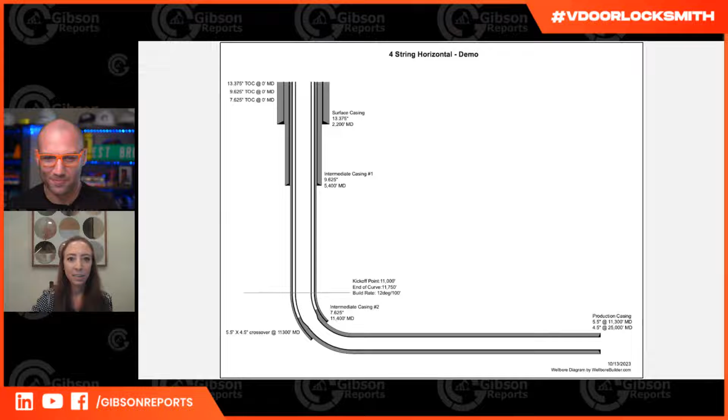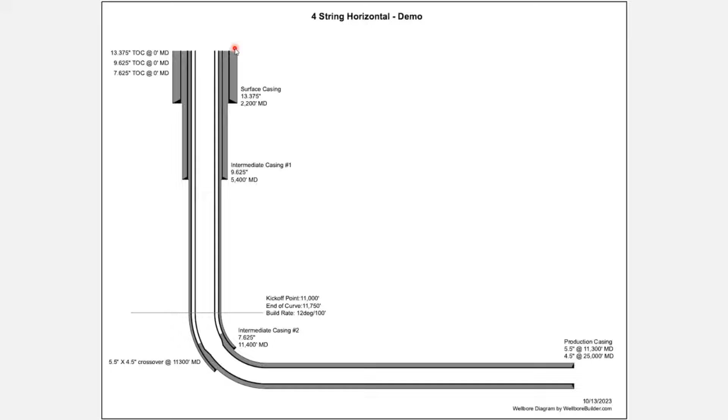All right. So the title says 4-string horizontal demo. Okay, so 4 strings means we got 4 strings of casing. So we'll start up here at the top. This is surface up here. We have labels that tell us TOC, top of cement, is at 0 MD. So up here, we could draw a little rig. So we have the rig up top. We have all those tops of cement at surface.

So starting on the outside, we have our surface casing. And this is going to be a structural casing, but it's also going to protect our freshwater aquifers. So this is pretty much going to be required on any well you see, surface casing there. And it's usually pretty big. Pretty big hole, pretty big casing.

Next up, we have our intermediate casing. This is at 5,400. This is just a made up well. But your intermediate casing is going to cover any hazards between your surface shoe and where you're trying to go to your target interval.

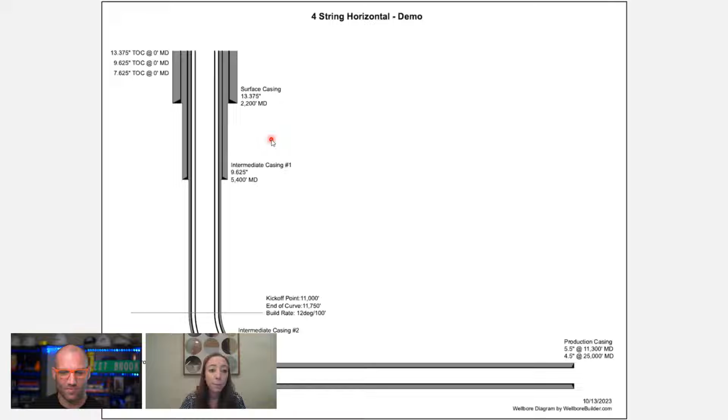So this could be, if you're in an older oil field, maybe a shallower formation here was a big producer back in the day. And now you have a lot of depletion there. Maybe that depleted interval has been converted to an injection interval, and you're going to see a lot of flow through there from offset injection.

Or maybe like in West Texas, there's a big chunk of salt there that you need to cover up. So various reasons for an intermediate casing. Some wells don't need it, and a lot of them do. Just depends on the hazards that you are encountering uphole.

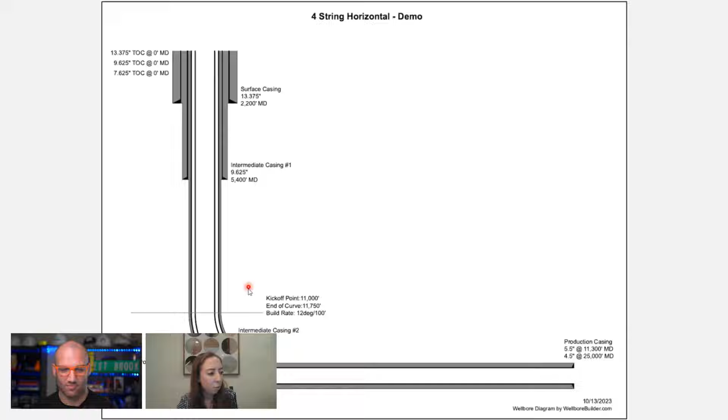So if we move on down the wellbore, we hit our kickoff point. We start to build our curve for that horizontal, and then we see another casing. So we have 2 intermediate casings on this well. So the costs are adding up in my head. You know, this is getting kind of pricey.

So we have this shoe set in the curve, and typically this is going to be because you're expecting higher pressure in your lateral than what these formations can handle. So you're going to protect against a potential underground blowout by covering up any weaker formations and getting ready for that high pressure interval, which we love. We love to drill a high pressure interval because probably we're going to make a lot of oil. So we like it.

Then we follow this horizontal down. We get to our production shoe. This is actually a tapered string. So we have a bigger casing size in the vertical and into the curve. And then we go down to a smaller casing size in the lateral because we don't have much annular clearance, you can see, between the intermediate number 2 casing and that big production casing.

And in some fields, you have a really tight window on your mud weight. You don't want to exceed it and frack the formation, but you need to keep that hole open and keep your well under control. So if you have a tight mud weight window, you want a bigger annulus. So we've done a tapered string here.

And this is a big feature I like to showcase. Drawing that taper in the curve in Excel is just tough, and drawing this shoe in the curve. So this is becoming a very common feature in a lot of basins across the U.S., so it's important to showcase. You can see our top of cement too inside that curve. All of that's pretty important to show on the diagram.

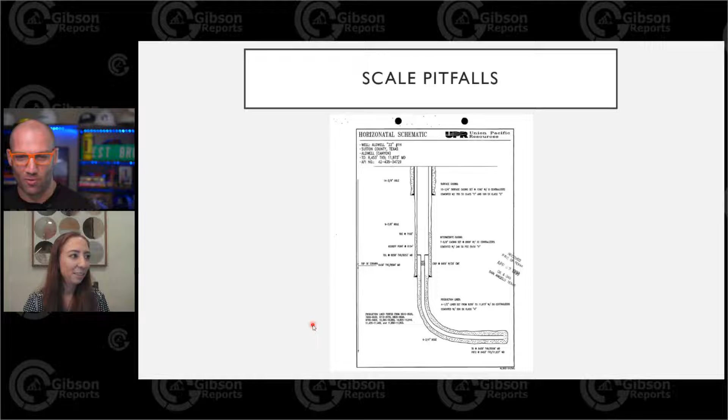Well, what are some common mistakes that might occur with the wellbore diagrams? Yeah, we'll skip forward a bit. Close your eyes, everyone. All right. Oh, wow, you got tons of awesome stuff in here. I'll make this a little bit bigger for us.

This is a beautiful wellbore diagram. I think it's hand drawn. You know, I love it. Has kind of a homey feel to it. Little dots showcasing the cement. It's nice.

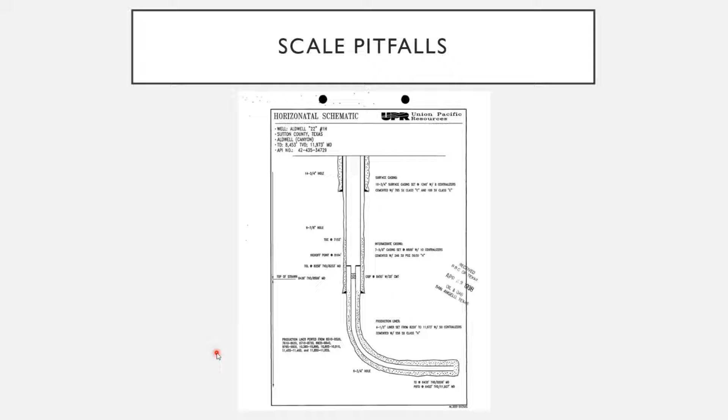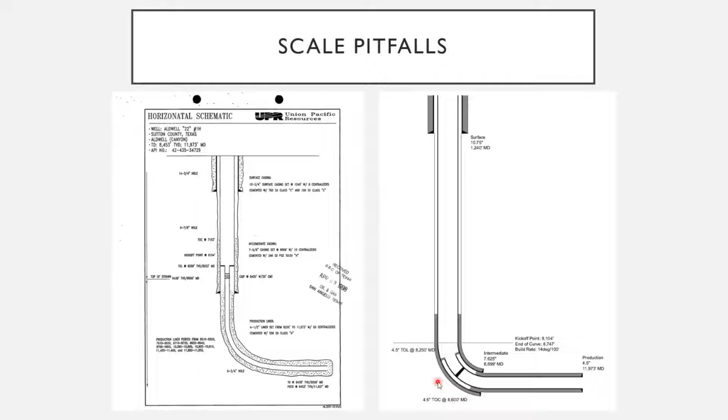However, when I look at the actual numbers on this well, this is how the wellbore diagram actually should have been drawn. So all of this that's happening up in the vertical on this diagram, it's in reality down here in the curve. So that's a pretty big difference. Like we just talked about, production could have a bigger pump deeper than how this diagram makes it look.

Our plug, we have a cast iron bridge plug right here for some reason. That's in the curve instead of in the vertical. If you needed to retrieve it or drill it out or something, that's a pretty big difference. So this would be a scale pitfall, I'm calling it, but a pretty common issue because it is so difficult to draw all this out. This is an easier way to draw it.

Wow. Yeah, I guess that visual representation could throw some people for a loop if they're just looking at it real quick and not taking in all of the context. Because if you're going to draw a picture, people are just going to look at the picture and take it as fact, as opposed to, if you're just going to have data information on there, then just have that, don't have the picture. But if you have both and they're not representative of each other, I could see where that would cause a lot of issues.

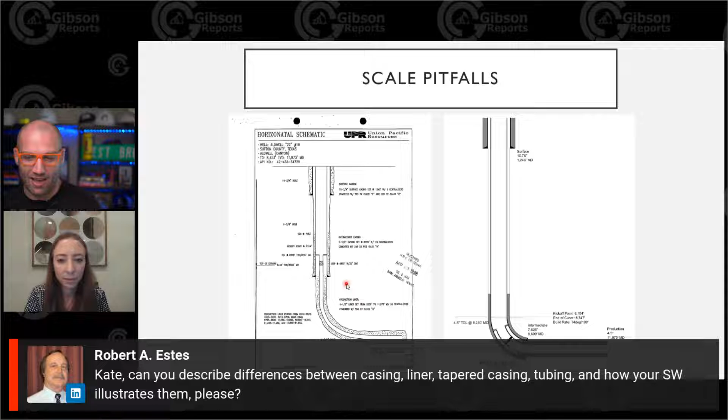All right. I do want to throw this out there. We've got a question that's already come in. Kate, could you describe the differences between casing, liner, tapered casing, tubing, and how your SW illustrates them, please?

Yes, great question. So casing, I would define as anything that's going from surface to a casing set point, to the shoe. We call it the triangle is representative of the shoe. So I would call a long string casing that goes back to surface, that would be a casing. And then down here where this casing does not go back to surface, I would say this is a liner, and we have this liner hanger right here. So the casing isn't connected up to the wellhead at surface. It is hung off a shallower casing.

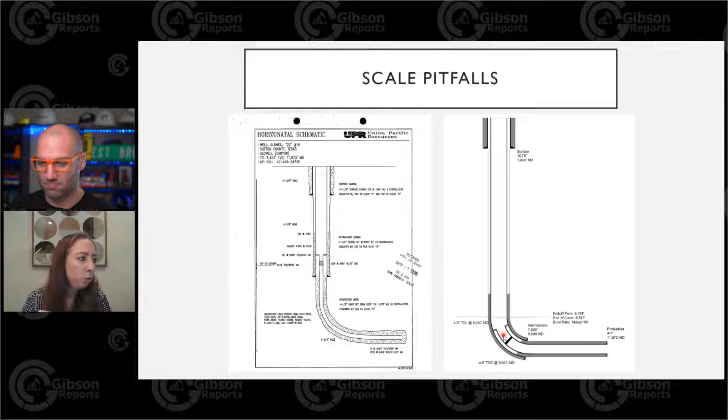And then tubing, let's see. All right, tubing would be something drilling probably doesn't deal with, and that would be on the production side that they'd run tubing within the casing. Here we show it with a packer right at the bottom of that production liner. And this is actually showing that this is an injection interval. So this is open hole, and we're going to pump down the tubing and inject into that injection interval.

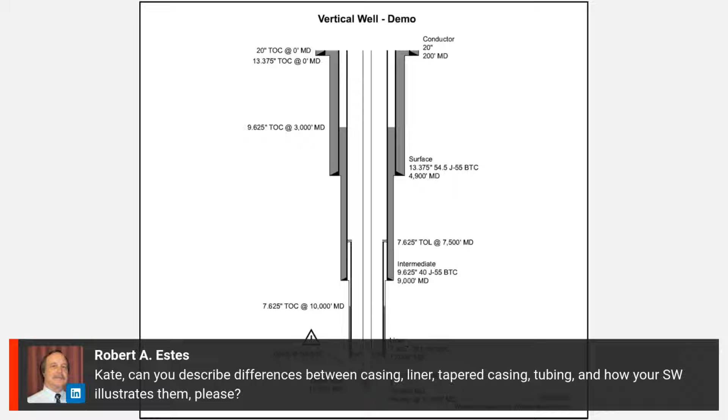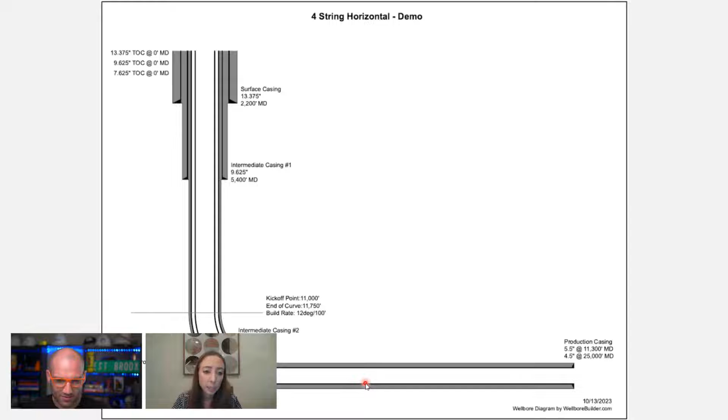Was there one more item on that list? Casing, liner. So here it was. Difference between casing, liner, tapered casing. Yep. So a tapered casing, like I showed here, is just very beginning, where we're going to change sizes, but the pieces of pipe that are different sizes are screwed together, and so that's shown in the illustration by these lines that slightly taper in to the smaller casing.

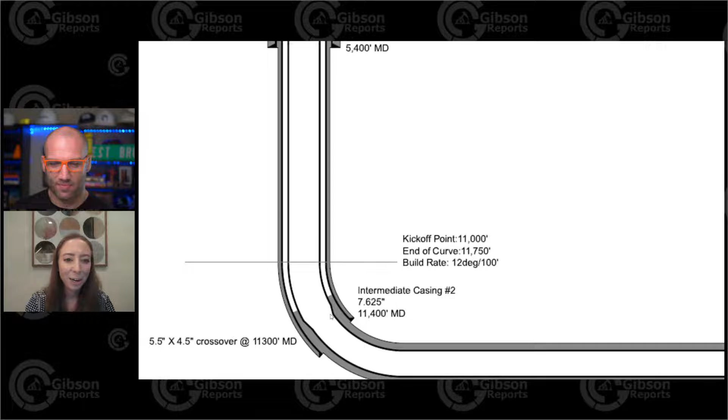So typically we're not going bigger. We're down below. We're typically going from big to small. And it could be multiple tapers. You might go 5.5 to 5 to 4.5. Just depends. You could have 10 different sizes of casing all screwed together. And that also occurs with different grades of casing. You might have a split string with 2 different grades for different reasons going on behind pipe.

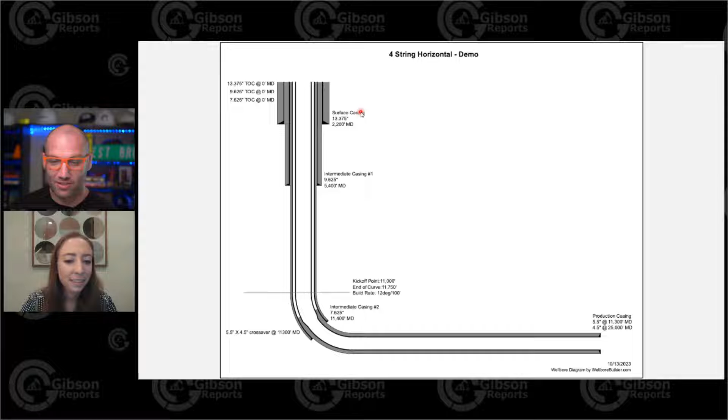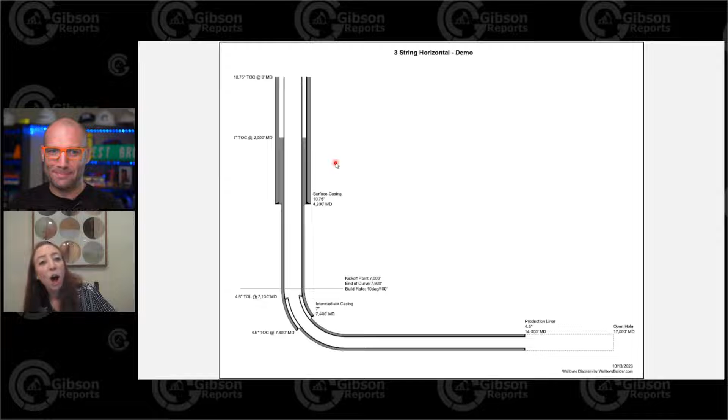So that's probably great. There are some rules about top of cement depending on state guidelines. And that's an important detail to share, whether you broke the rule or it's all good. Even if you don't get top of cement where you need it to be, it needs to be shown properly. Nobody breaks any rules in this industry. Oh no, well, to go in and remediate it after, of course, but you want to show the detail correct so everyone knows we probably need to go fix that later on.

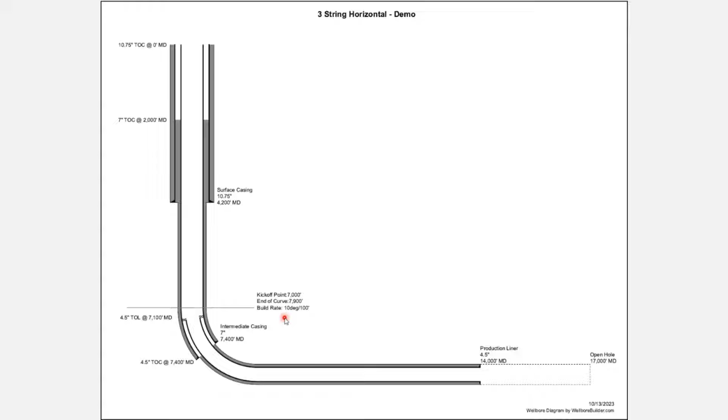And then here we see another little gap of no cement. The liner cement goes all the way up to the intermediate shoe, but didn't quite make it up to the liner top. It looks like we set this liner a little bit short, didn't make it to TD. We have this whole open hole section. So you can see this section is the same diameter as your production hole. So we can understand from that we actually drilled with that same size bit all the way to 17,000, but then for some reason couldn't get the casing all the way down there.

Oh, that's because our famous Aaron Baxter was probably the directional driller on that one. And probably messed the hole up.

But he says in here, critical for checking hole depth, knowing when you will tag up on a shoe, an extremely important tool for directional team, including MWD, David.

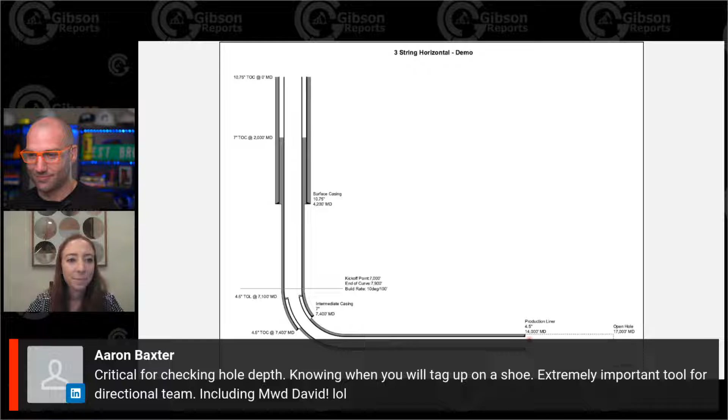So, goes to show how good of an MWD hand I was. I'm sure you were great.

But yeah, if you have this shoe in the curve, directional is probably not happy. You're not getting a survey for quite a bit, drilling blind for I don't even know how far out of that shoe trying to build the curve out. It's not the easiest setup, but yeah, important to know. And I think the diagram is a good tool to easily show it.

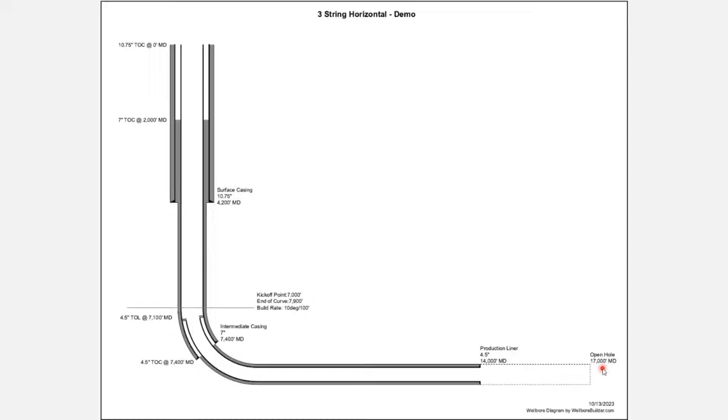And so does that show at what angle? Can it show what angle the casing was set at? Yeah, so this diagram specifically, it's not built to scale, obviously, because this is 17,000 and this is 4.5 inches. So it's not to real scale, but it is to a scale. And so whatever degree of the curve that is, it is to scale. So yeah, we should do that. We should pop an angle up there for sure.

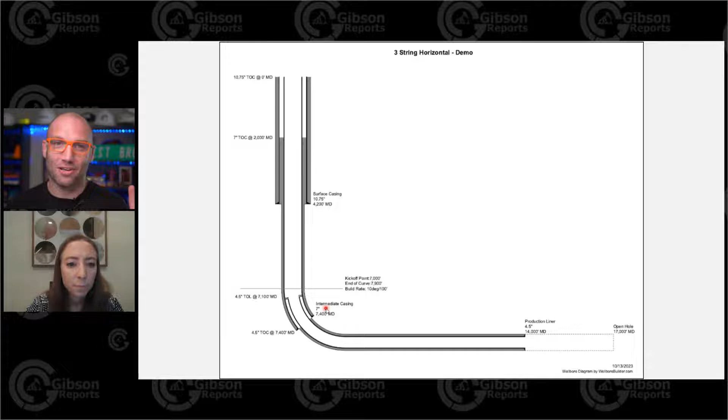I'm just asking questions, okay? So I like it. I mean, it's already calculated. And that's the beautiful thing. I love math, and it's math, and it all makes sense. And see, even Aaron says, it was me. See, it was him that messed up and couldn't get us our casing to bottom.

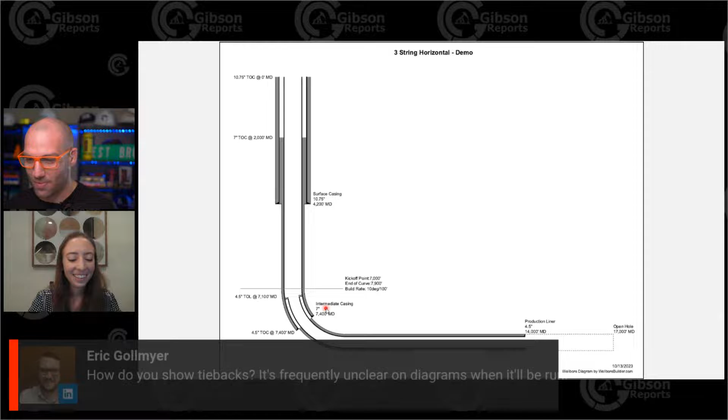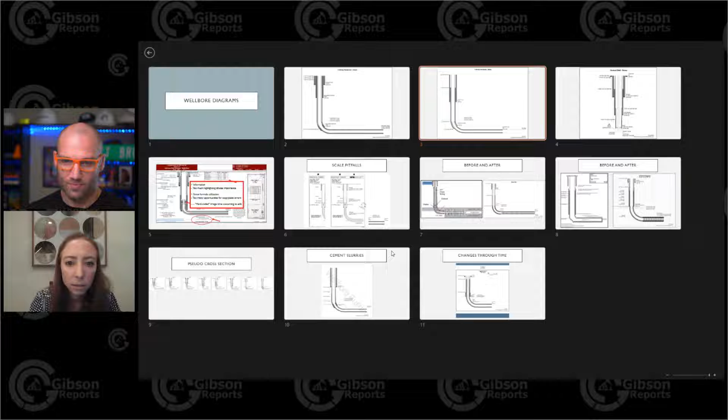As far as when it will be run, I think probably the best way to handle that is to have multiple diagrams for the life of the well. Don't try to put everything on one. Have a pre-drilling diagram. Have a, maybe even as you make changes to casing set points while you're drilling the well, have an as drilled at the end of that, that you're going to hand over to completions, and then have an as completed diagram.

And maybe you can show on that one tieback to be run. And then once it gets run, maybe publish a new one. Say, okay, the tieback was run. But I think having multiple diagrams kind of tells the story of the well as it gets built. So I think that's a good way to handle the when part.

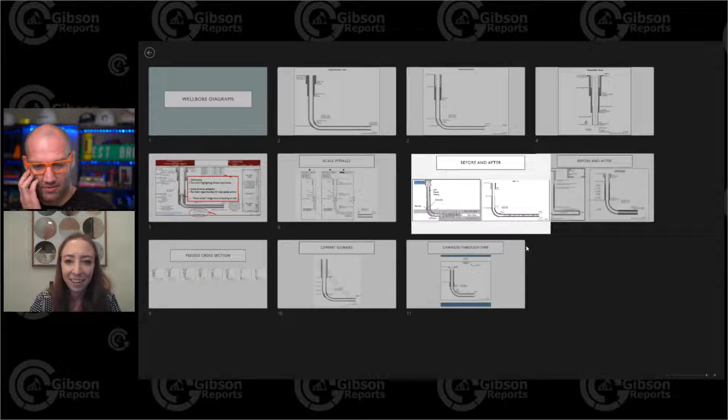Excellent. Okay, I know we're skipping around in here, and you had a couple of other examples. I think the next one was a vertical well potentially there, right? Yeah, let's check out the vertical. Okay, so obviously the verticals are a little bit easier to draw by hand or in PowerPoint, Visio, Excel, but they still look nice drawn in a web app too. So this one is here we've decided to show this conductor, which is not always shown on diagrams, because usually, as long as it's there, no one really cares about it.

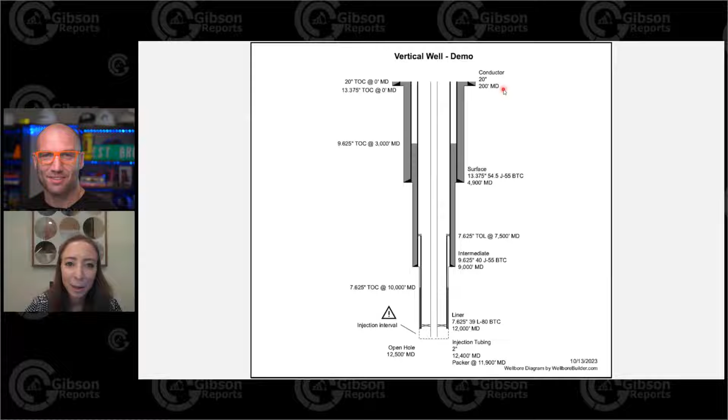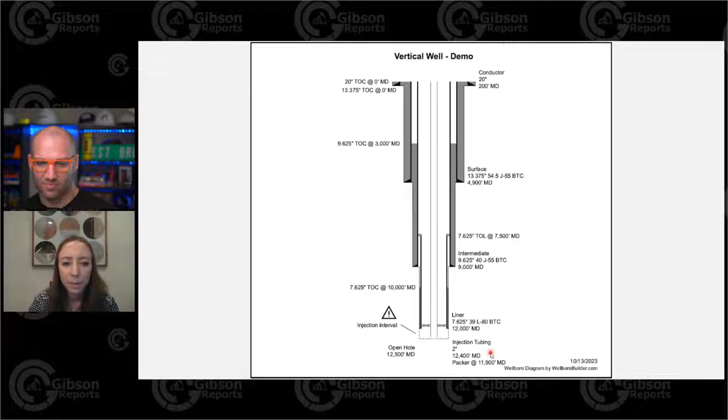So this is 200 feet of 20-inch up there looking really squished. And then we have this surface casing, intermediate. We did 7 5/8 liner, and then ran this 2-inch injection tubing, which honestly, I think we could go bigger than 2-inch in 7 5/8. We might consider upsizing that tubing there. Got a little icon here to show, whoa, look out, we're going to inject here. And showing that open hole with the little dash line.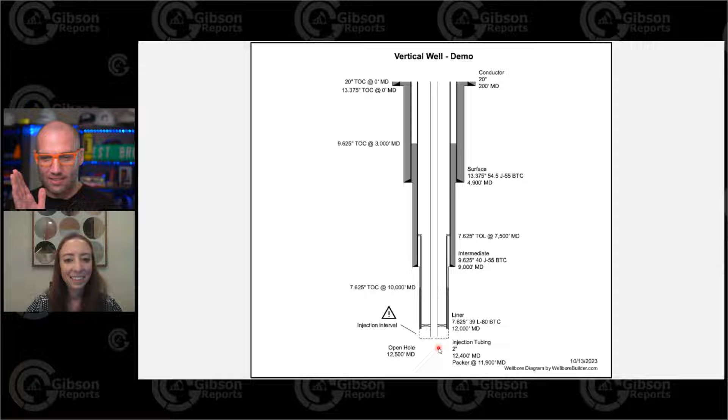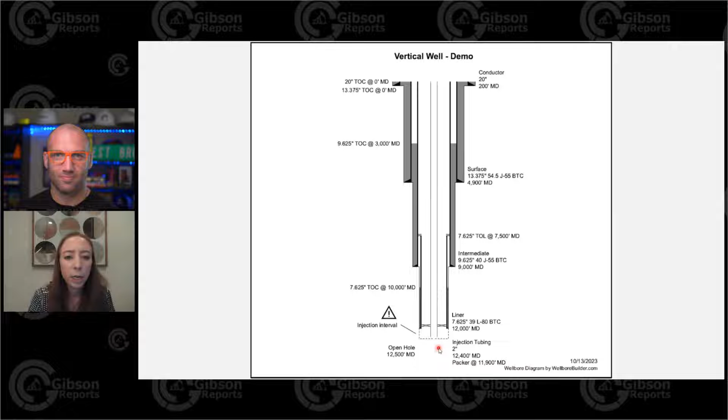Wow. Okay, we're starting to get some comments here, but I have a quick question. So is the sizing always on the right and then the top of cement comment always on the left? Is that standard? Personally, I don't think there's an industry standard, but personally, I like them to be separated out. In my software specifically, all the labels you see are draggable, so everyone can have it however they like. Sometimes it can get a bit crowded if you have a lot going on in the curve. Obviously the inside radius is smaller than the outside, so you can make it your own. I don't think there's a clear standard, but maybe we could all join hands and decide on one.

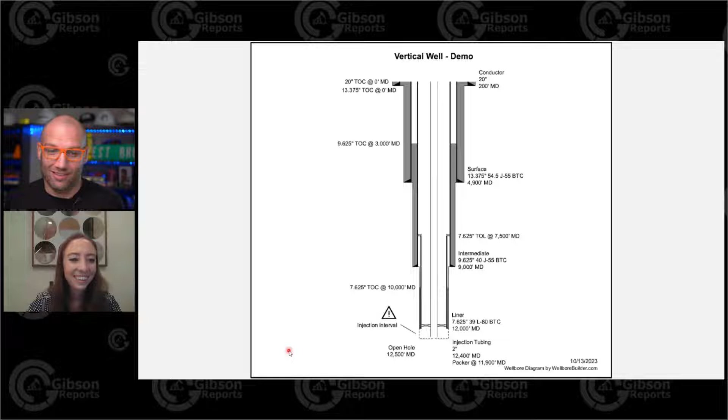Well, hey, you could be the one to set the standard, and everybody just follows it. Well, right now, I'll let everyone have creative license on that.

All right. So we're starting to get some more questions. This one's from Devi. Does it follow a data model? For instance, for casing, its weight, size, grade, connection, etc. This way, it's easy to import, export information, including correct location and information. Does it follow a data model?

Yeah. So I think you're talking about my software specifically. Sorry, David, I'm not trying to have a commercial. No, that's all right. I'm more than happy to have you come on the show and be able to educate us all, even if it's partially on what you do.

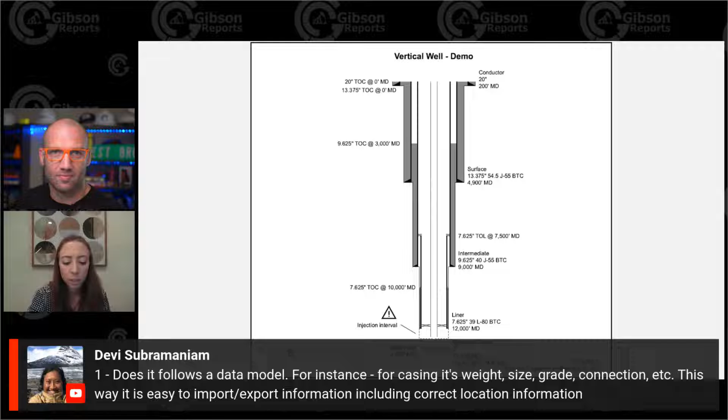But yes, this is actually one of the issues that happens with Excel, especially that location information. You know, there's so many decimal points in the lat long, and you've got to get it exactly right. And then there's a typo, and they end up in the wrong slot on a 10-well pad. So yes, all of that is very important. And in our software, everything is fielded out and we do have an API. So everything gets matched to its right field.

And I think that is my vision for the future, is that people aren't even typing into a web app. It's just all connected. And we have organized data from the start. And then there are no typos. Everything's connected. And no oopsies due to a fat finger. Preach. It'd be so nice. Nice, clean data sets.

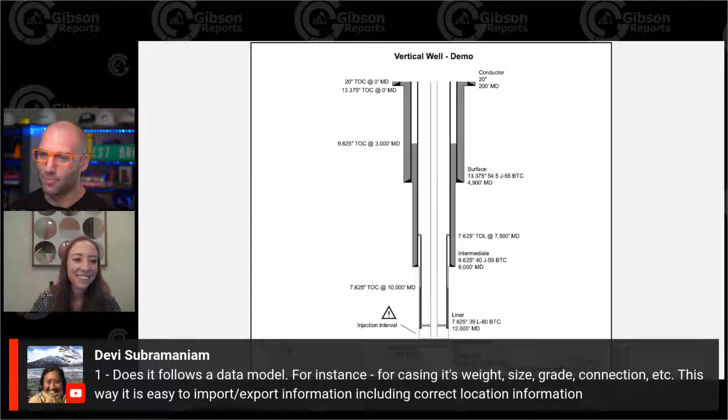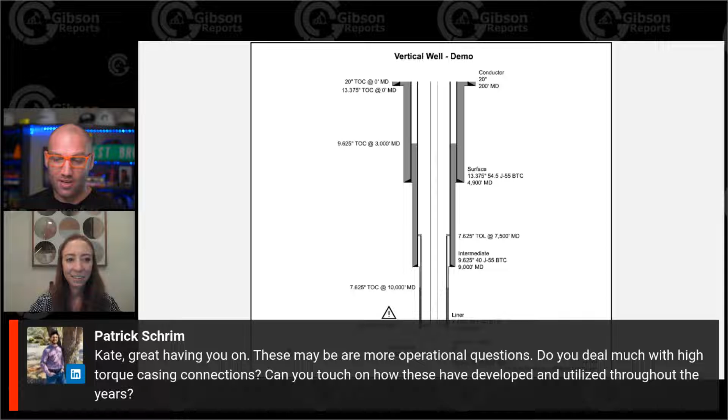Devi, thank you for your question. Do appreciate it. All right, Patrick asks, great having you on. These may be more operational questions. Do you deal much with high torque casing connections? Can you touch on how these have developed and been utilized throughout the years?

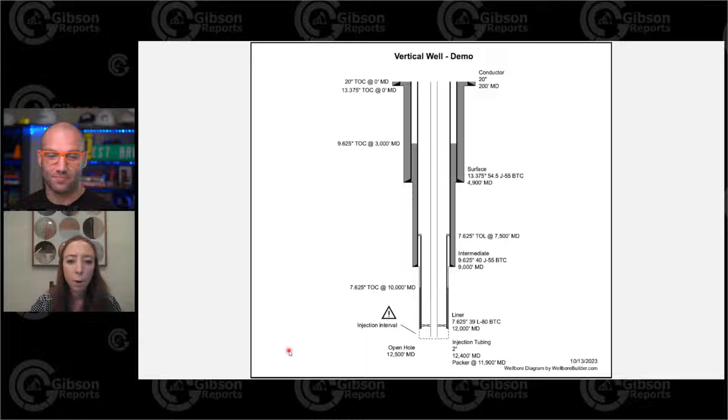I can try. I am not up to speed on the most cutting edge high torque casing connections. But I can give a bit of a history lesson, back starting out when I was on a rig years ago. We were running buttress casing, and there was this great invention called torque rings, a metal ring that you stuck in the slot there in the connection to butt up against to have higher torque. And I think there was a pink, a yellow, and a green size, and they would come out and measure your slots, your API casing, and then they have a pink ring for that one. And it gave us some extra torque.

And then the casing company started just building that in and cutting that into their connections, and then you didn't need the torque rings anymore. And then we started really getting into these different hole sizes and needing more semi-flush connections still with that high torque rating. So that's just from the U.S. onshore land perspective history lesson of the high torque connections. I'm sure there's a lot more going on now. Yeah, anybody that's watching, feel free to add your comments into the comment section about any of the other ones.

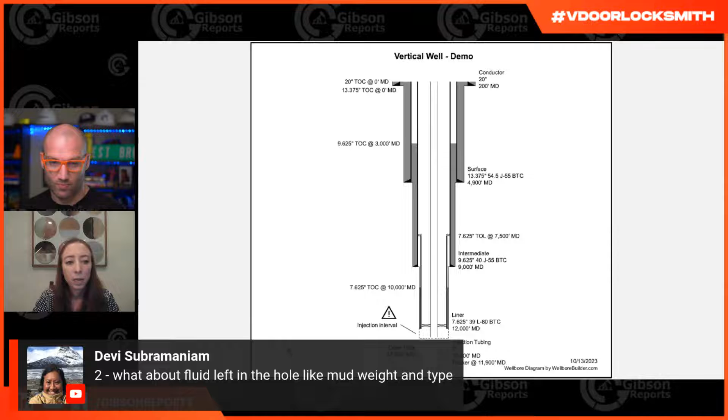Another question from Debbie: what about fluid left in the hole, like mud weight and type? Excellent question. That's usually very important to know, especially on the completion side when you're handing over. They need to know what fluid is left behind. Maybe to open a toe sleeve, they need to know what pressure to apply, and got to calculate that hydrostatic. And so, yes, I would definitely put that as a comment on a diagram as part of your handover. Definitely would call that out to the attention of the next guy touching the well. All right.

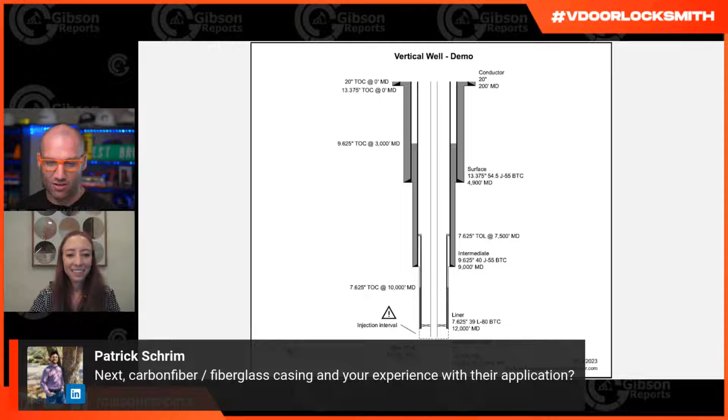Another question back from Patrick: carbon fiber / fiberglass casing and your experience with their application. I do not have experience. I would love to hear if someone else does. That's the first I've ever heard of carbon fiber being used. I've heard of some fiberglass applications, but never carbon fiber. So hopefully somebody that's watching can add their thoughts in there.

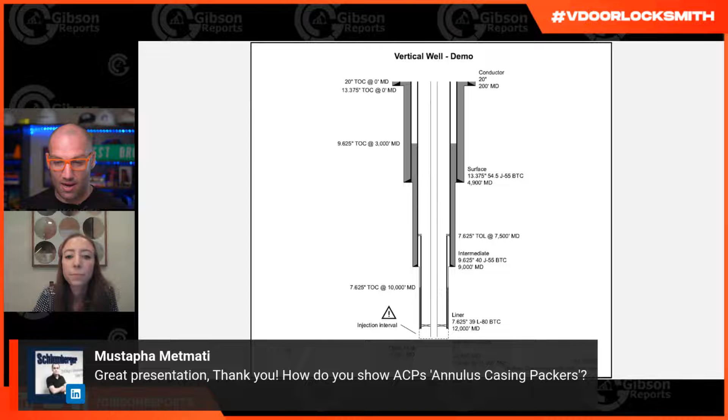Mustafa says, great presentation. Thank you. How do you show ACPs, Annulus Casing Packers? I have no idea what that even is. I bet you do, David. I bet you just haven't heard it be called that. Because a lot of times we have a DV tool, which would be a sleeve that opens on the casing midway somewhere in the string.

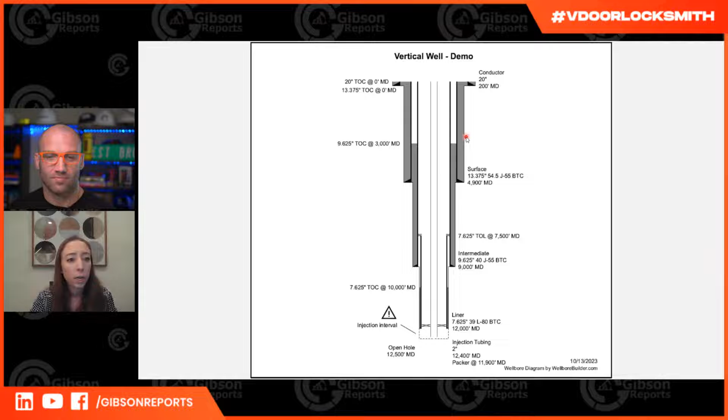So say right here, or let's come out one. Say we had a loss zone here and we weren't going to be able to get our cement up above it. We could have a DV tool that opens, and then we're going to pump through that DV tool to have a lighter fluid column and hopefully get that top of cement where we want it.

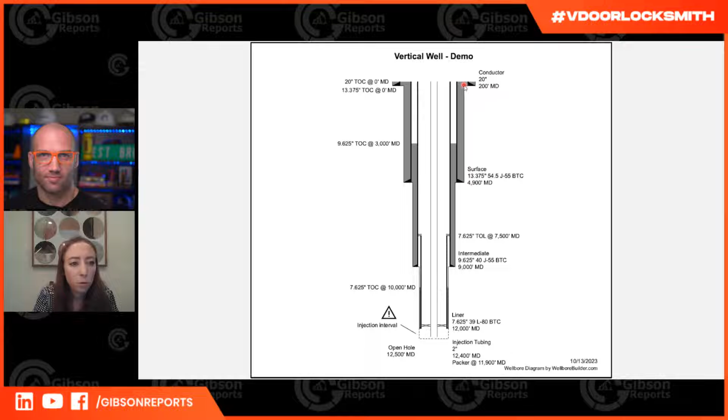And a lot of times that will also have that packer underneath to help stabilize that fluid column. There are other uses as well, but that's one of the more common ones we see. I do not have an example of it, but we draw it similar to these hanger packers there, a box with an X. Box with an X.

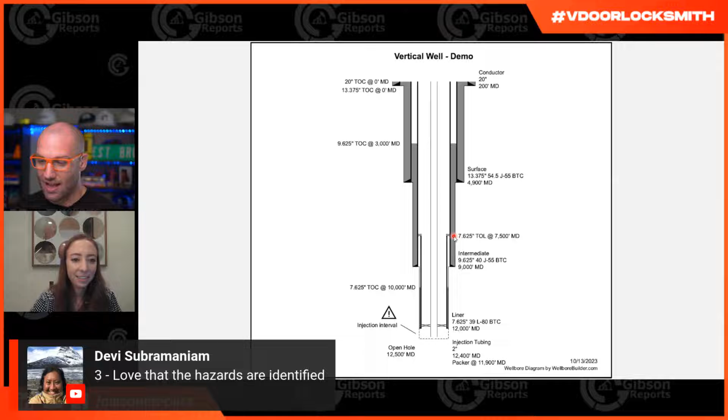Okay. All right. Debbie says, love that the hazards are identified. Thanks, Debbie.

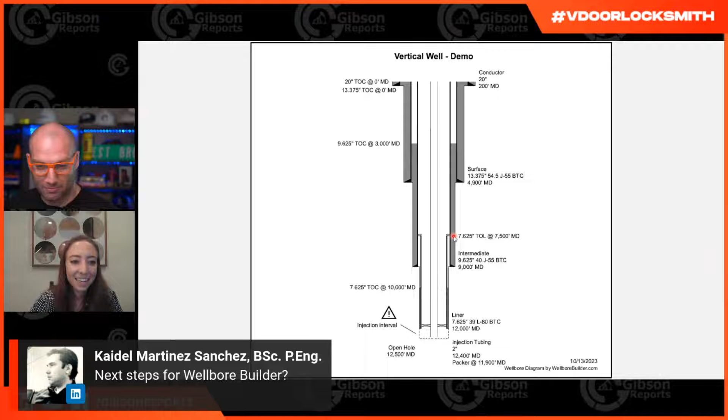Here's a great question. Next steps for Wellbore Builder. Next steps, like I said, would love to have a broader digitalization effort. Would love to integrate this visual with existing data frameworks to get rid of that user input part where you're introducing errors and wasting people's time sometimes. Not always, but sometimes, you already have the data set up in a nice format in a database somewhere. Why not just push it on over to us and have the image show up for you?

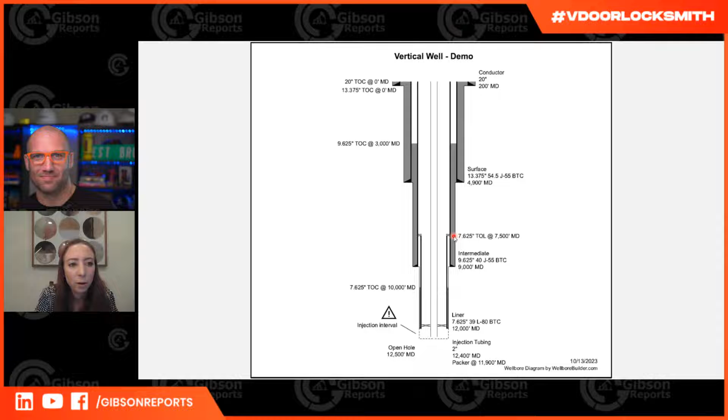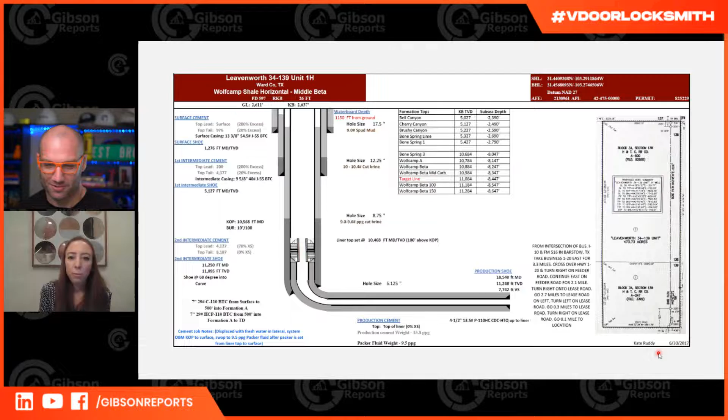Makes sense. All right. So what are some of the other examples I know that you've got in there for us? Okay. So my name is down here at the bottom. So I made this, so I'm not hating on anyone else, just myself. This looks like a pretty nice picture. I made it, so I don't think it's terrible, but a few things I did want to call out.

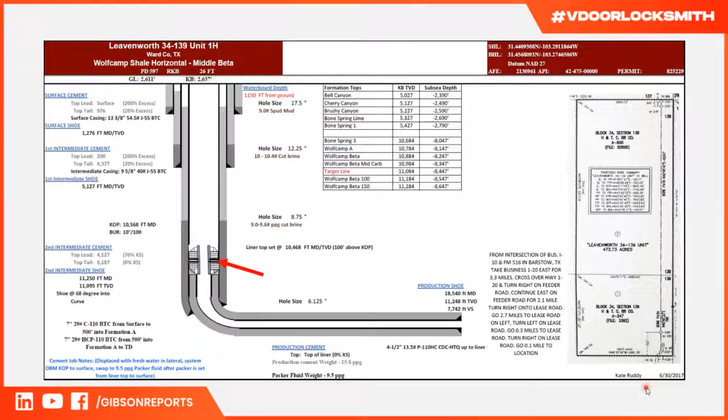First off, I don't know if your eye went straight to this weird cartoon of the liner hanger. It did. Seems a little out of place, but that was the template, so I kept using it. It looks a little crooked too, so that's not my favorite thing. Like I just mentioned, I like a clean diagram. Keep it simple. Don't have the cartoons in there. Just geometric shapes. Next, you see it all over the place, but here especially, we have multiple font types, multiple sizes, all caps, gray, black, Times New Roman. Just a lot going on.

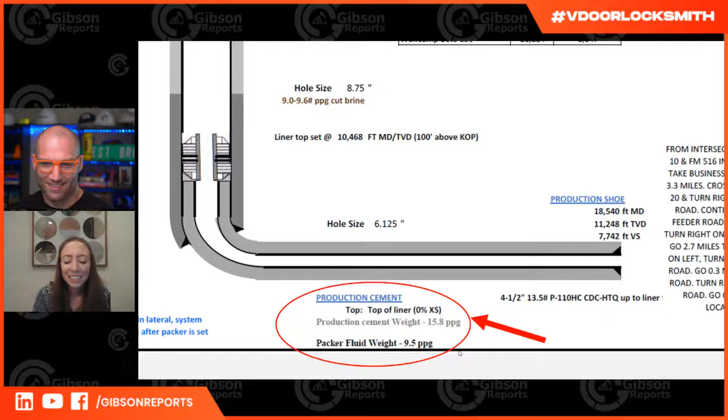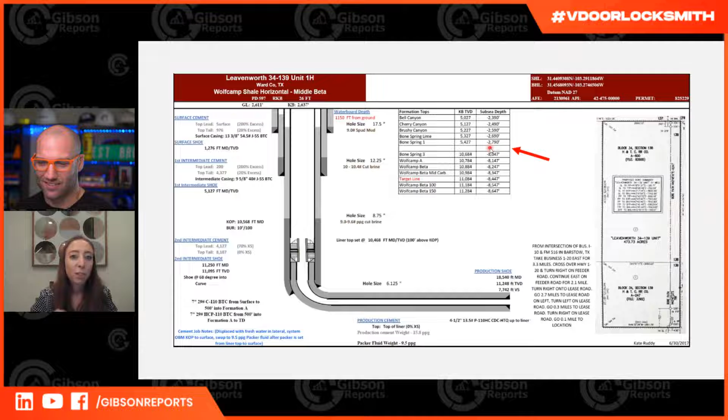And then up here, we have this blank here. For some reason, we didn't get a top for the Bone Spring 2. Seems important to know. It's not there, but that had to be left blank because there are formulas on the next tab of the spreadsheet that are pulling in from that table. And if you put the second Bone Spring depth there, the formula would have been wrong on the next page. So we had to leave it blank, and it just doesn't look great.

So in summary, this is super informative. We're getting a lot of information here, but all the different colors and highlighting every different thing really dilutes the importance of them. The formula utilization is great to simplify downstream tasks, but there are still a lot of opportunities for those copy paste errors. And then the hard coded image, it's time consuming to edit. Moving these little triangles further in the curve is not a big deal, but this curve cement, man, it is a pain to edit. So just another type of diagram, a colorful one, I guess. And then the cost of color printing, add that to the list.

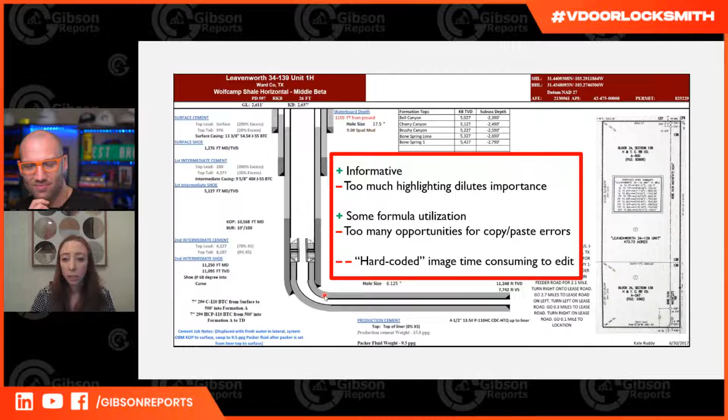So how often is it, because I noticed that the plat is there as well. How often is that in the Wellbore diagram, or is that included? Because I know there's more information on this one than what I've seen in some of the other examples. Yeah. This is really a roadmap for the well, including we even have driving directions to the well. So I think it's personal preference. I think it is helpful to have the plat, a little bird's eye view next to your cross-sectional view.

I love the imagery, especially if you have a multi-well pad with a lot of different slots. It's helpful to have that zoom in also over to the side. I think it's totally personal preference, and you might want to provide that to some people and not to everyone. It just depends on your specific operations, but I think it's sometimes useful to have the plat there.

What could potentially go wrong if the information on a Wellbore diagram is not displayed correctly? Like you showed us that example in the past where everything looked like it was taking place in the vertical, but it was actually taking place in the curve. Do you know of any stories or any instances where something like this was displayed in the Wellbore diagram and actually ended up causing problems down the road? Yes. This well we're looking at was drilled in the wrong slot.

And unfortunately, the other well isn't shown on this plat, but the other well was going the other way. So we swapped which well went which way. And so we ended up, it was a big, I think they were different lateral lengths too. This looks like maybe 2.5 miles or something.

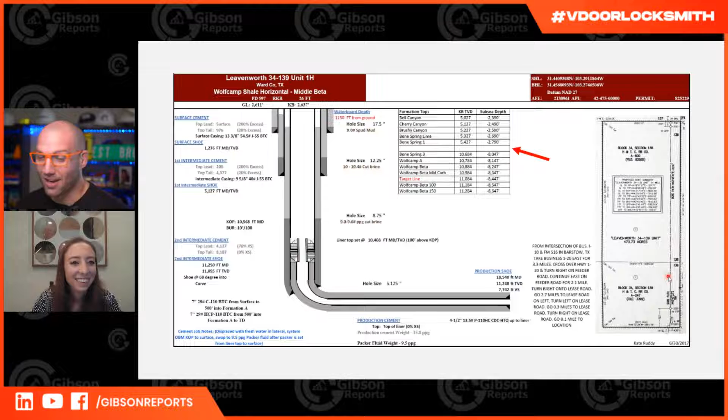Ooh. Wow. Okay. All right. So you've got some more examples there. That's a lot to take in. It's like how did we... Okay, we saw that one.

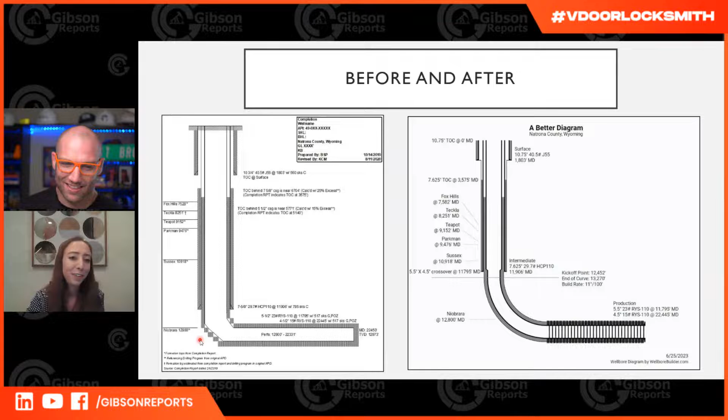Okay, here's another one. You can tell this was done in Excel. We got this blocky curve down here, which honestly is pretty smart. Just fill in a few cells. You get the idea. This has a very 8-bit look to it. Yeah, right. It's not putting your best foot forward when you submit this out to the world.

So this is my beautification. I think it is great to have these formation lines here. On this example, I've called them out using these leader lines. I do think the straight line is a great visual also. I might have an example of that later on too. You can see this straight line. You're encountering that Niobrara in the curve, which is good to know.

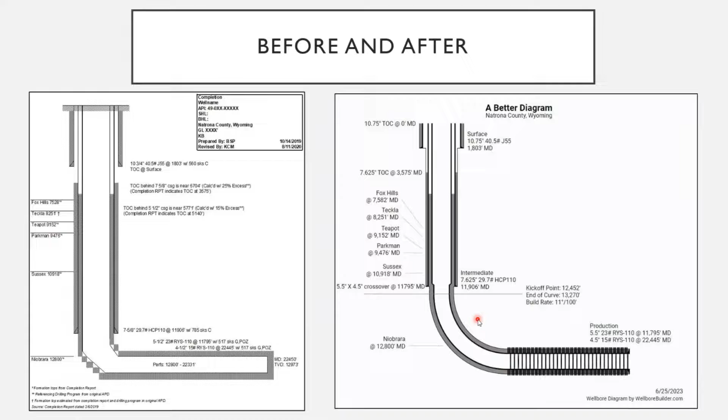We got the taper here too. I think they just left the taper off in that Excel example. So just a little bit more information and a lot nicer looking. Should definitely post some of these before and after pics on LinkedIn.

All right. I noticed in the horizontal there, you've got a lot of vertical lines on it. What are those representing again? Yeah, so we have a completion. This was obviously not in the before picture, but we did put a completion on it. So each of these inside the casing represents a plug, which would basically be one stage of the frac. And then we have one little line for each cluster.

And you can change the imagery to be however many lines you would like to see. Or you can have it scale with your cluster count. Wow. I've never seen one with this level of detail on it before. This is fascinating. I'm learning so much here.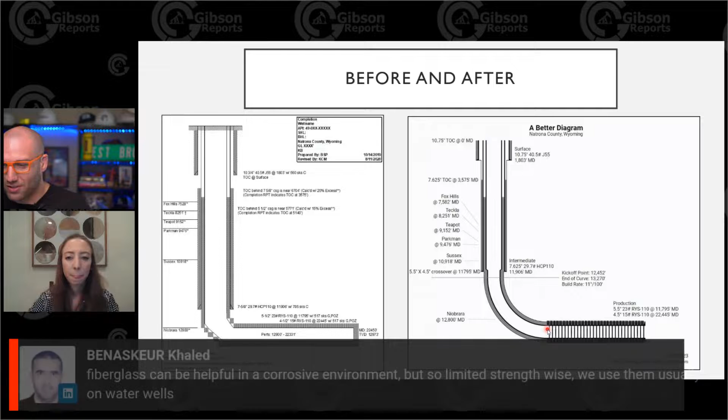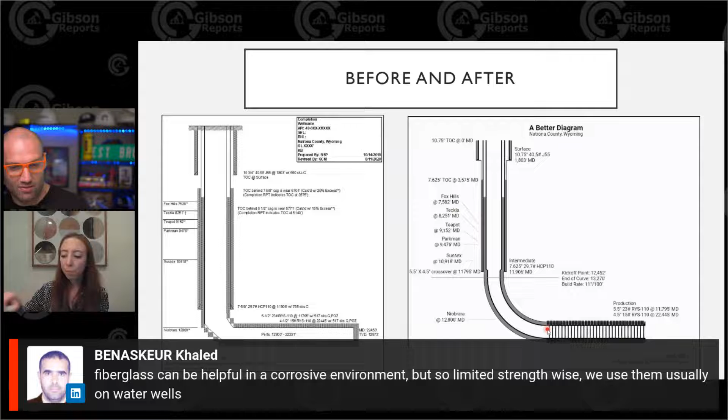So a couple of people have commented here. Fiberglass can be helpful in a corrosive environment, but so limited strength-wise, we use them usually on water wells. Well, thank you, Khaled. And then Eric said a digital pipe tally is much needed. I do believe there's some people out there doing that. I'm not 100% sure. Have you encountered that at all, Kate? I would love to hear some company names thrown out. Oh, okay. Anybody that's doing digital pipe tallies, let us know.

From my perspective, it would be a fairly easy thing. Lasers can measure distance, thing on either end. Boop, boop, boop. I don't know. Maybe it's one of those ideas where it's so simple, why didn't we do it, right?

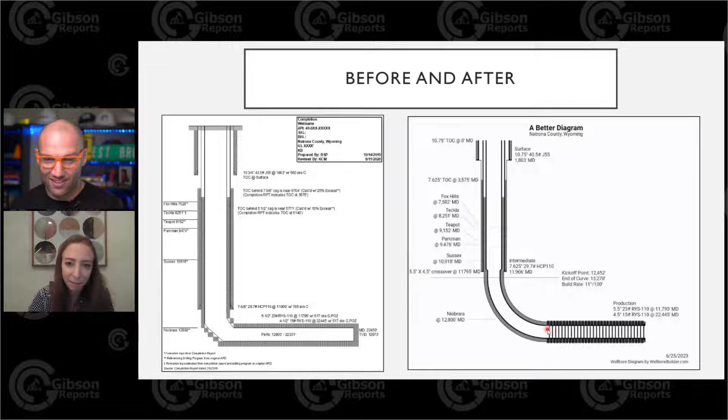All right, so do you have some more before and after pictures for us there, Kate? Oh my gosh, what was all those? I am out of before and afters. Okay, so a different use case for wellbore diagrams. I was playing geologist. Ooh.

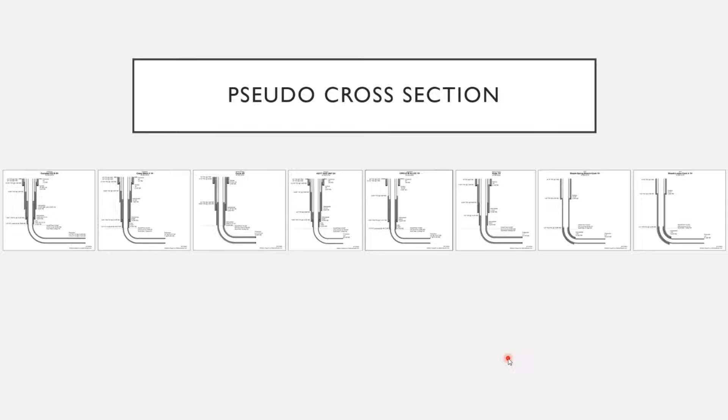Sometimes in drilling, we think of man-made features as important geologic elements. I remember a place where I first started drilling. North of the highway was okay. South of the highway, not okay. So for this look, I was just following a highway and building out diagrams as I went along that highway. And it's kind of interesting to see, they're small for a reason. We don't need to get bogged down in the details, but this is complicated.

And then I got over to the east side and oh my gosh, whoever this company is on the eastern edge of this route I'm taking, they have it figured out. This is way simpler than this. And then I dug into it. I like to do a big data sweep to find out where you need to dive in. So diving in, I was like, let's find out the secret over here, what they have figured out.

And turns out it's the same depth and the same field name, but it's actually a different target formation. So probably lower pressure. They don't need to have all the different casing strings. They can just get that one all the way down into the curve and then drill their lateral. So a quick learning, taking a drive down a highway, building diagrams along the way.

Wow. So could you use the wellbore diagram as you're going through the drilling prog and just be able to do a quick reference of how much this well might cost, or something that might correlate back to the AFE?

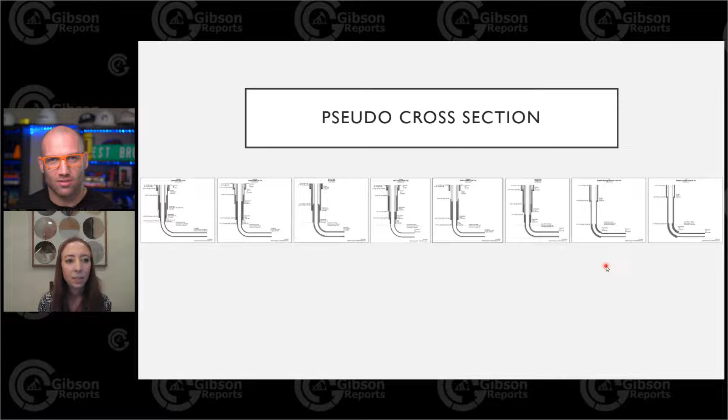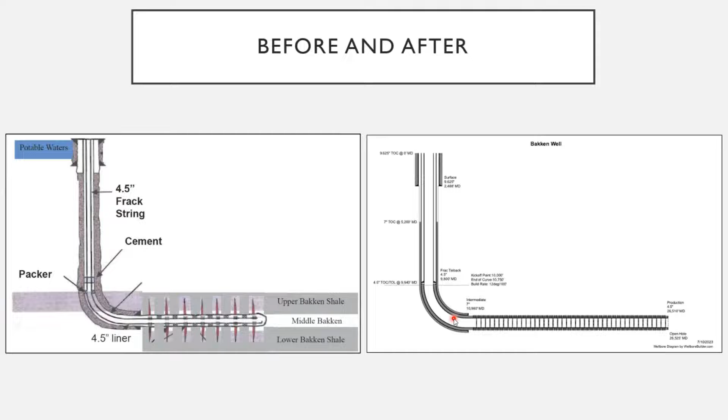All right, so this kind of goes back to the very beginning of this, but what are some of the most essential things to be able to have in this wellbore diagram for that handover to the next person? Yeah, so let's get back to, we'll be here. So for completions, they want to know where their top of liner is. They want to know the size of this casing. Hopefully they know well ahead of time, but you want to make sure what was actually run is what we all decided on originally, because these plugs need to fit inside that casing. So the diameter and the weight need to be the same as what we talked about beforehand, so they have the right plugs.

They need to know the actual set depth so they can plan their stages, because as we can see here, we drilled to 26,525, but we set casing 15 feet off bottom. So they want to know the exact set point. Probably would have been nice to have, if we had a toe sleeve here, call out that depth, so they know that shoe track and toe sleeve length, and that's going to be a diameter change there, so they wouldn't want to run into it.

And then for the tieback, you'd want to know exactly where that liner hanger is. And then once completions is going to turn this over to production, whether that tieback is there, or if it was just for the frac and then frac pulled it, or if production needs to pull it, whoever needs to deal with that, or if they're going to leave it in and run a smaller pump in there. Production needs to know the size casing that's in the ground. And it's pretty critical, as we can imagine.

And then, if there were any stages left untreated, that might be a good thing to note. And if any plugs were not drilled out, that's a great thing to keep on the diagram. Say we have 1,000 feet of plugs at the end of this well that we couldn't drill out. We'll go back in a few years and drill them out then. So anything that gets left downhole, we need to know about for the life of the well.

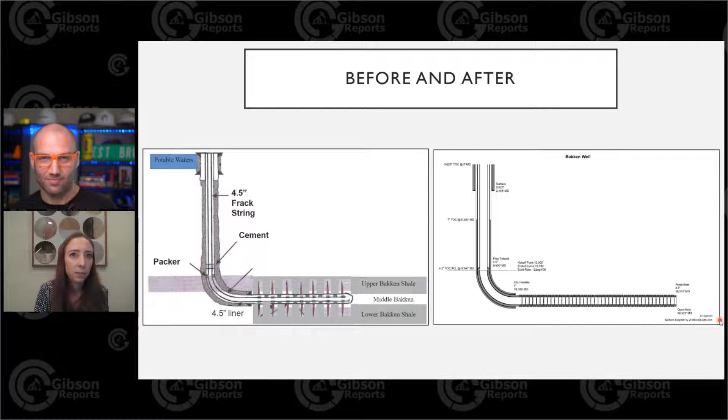Excellent. That's the way it works best. Nothing needs to be secretively handled. We should strive to make the industry the best as a whole and share those standards. And the more people that adopt them, the faster we can improve as a whole. So I'm not trying to gatekeep. I just do think that it's in the works, and I will definitely let you know when I have more information. I know there's plenty of things in the works in the industry, and hopefully this is one that can actually come to fruition.

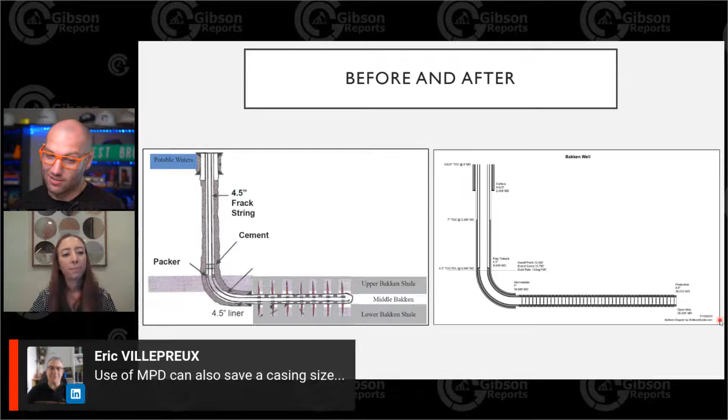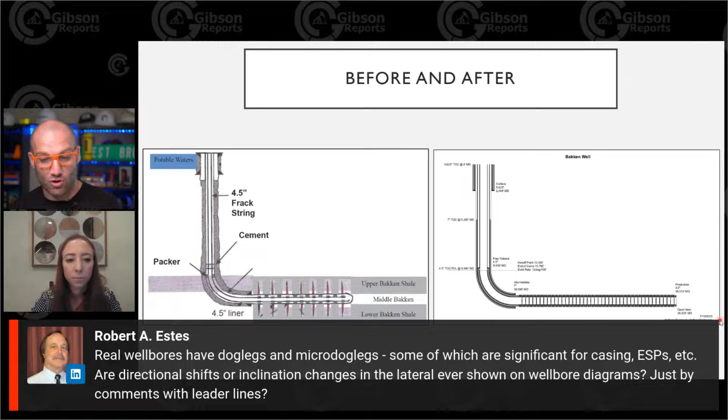Eric says use of MPD can save a casing size. Good point. Yep. And then Robert says real wellbores have doglegs and micro doglegs, some of which are significant for casing, ESPs, etc. Are directional shifts or inclination changes in the lateral ever shown on wellbore diagrams just by comments with leader lines? Phenomenal question, Robert. That's actually very intuitive. Yes, wonderful question.

And I do think for that, a comment probably is the best use, to call that out and maybe have the exclamation point there to have a warning sign. I don't think visually showing the dogleg is going to do much because of the scale. You're barely going to see a 10 on this sort of lateral. So I do think you're right that the comment with the leader line and the depth is definitely the way to go.

Excellent. All right. Are there any other samples or examples that you've got for us? I don't want to cut you short. No, we're all good on samples. Okay. Well, this has been a phenomenal amount of information for me. Like I said, I've learned a lot with this, and I appreciate it. Anything else that you'd like to share? Some other things that we should know about either yourself or wellbore diagrams?